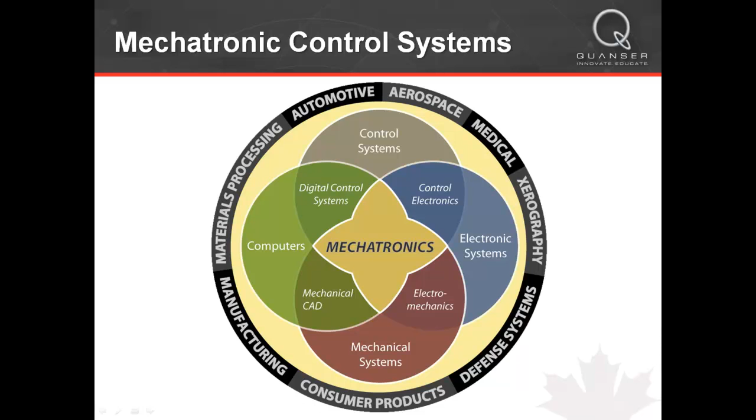So it's everything - enable educators. We've been at this now for more than two decades, and there are over 2,500 engineering universities around the world that use Quanser solutions. So pretty much every top institution you can think of, whether it be Princeton or Stanford or IITs or MITs, most universities in the world are using something or another from Quanser, whether it be hardware or software or data acquisition cards or whatever.

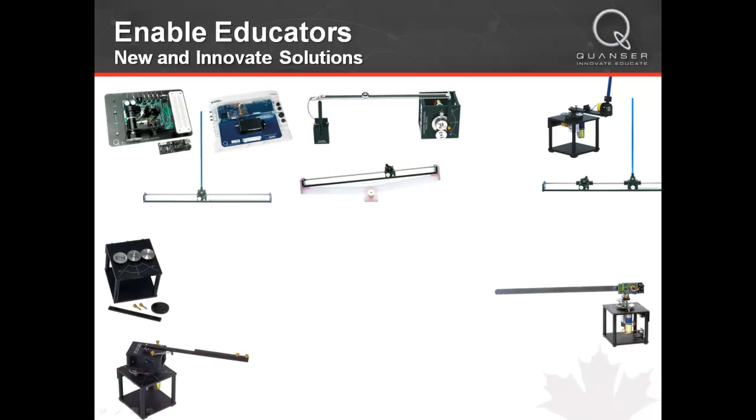Over the years, we've had the opportunity to build over 100 different experiments, such as DC motors, everything from robots to unmanned air vehicles and helicopters and earthquake shake tables, and the list just goes on and on, with the common theme once again being real-time controls and mechatronics.

I've spoken about this again in previous videos, but I wanted to go over it again: our systems are, or I'd say 90 to 95% of our systems are at this point, or will be very soon in a very short period of time, fully compatible with LabVIEW. In fact, we even released new software called RCP, which will make LabVIEW users working in the control space' lives considerably easier.

I wanted to quickly show one page from our website. If you come to our site and click on workstation components and go down to control software for NI LabVIEW users, you can get a lot of information. Go to quanser.com, then workstation, then control software for NI LabVIEW. The specs are right there on the left-hand side, and you can link to all our blog articles and YouTube videos - a great resource to learn more about RCP.

So our recommendation, or what we've seen work in the field, is that universities that have the vision and foresight to bring together all these labs into one space really increase the value of the experience for students and professors, and from a price point perspective, it reduces the cost of that one multidisciplinary lab considerably.

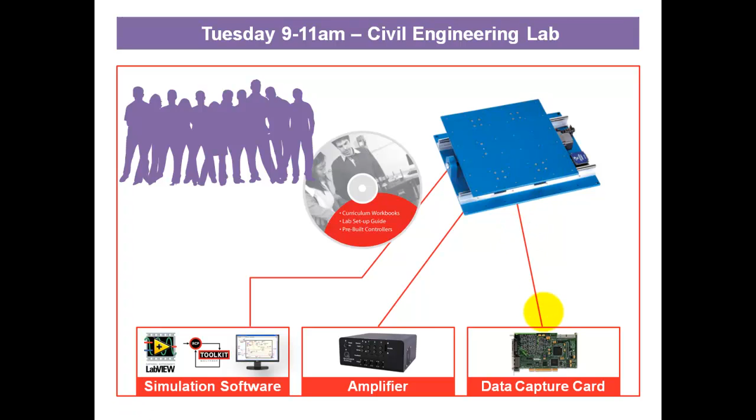So let's say you have a civil engineering professor who wants to simulate different types of earthquakes on building structures, and they need a shake table. You can essentially roll up the shake table, connect it to your amplifier and data acquisition and to your computer, and you've got a civil engineering lab.

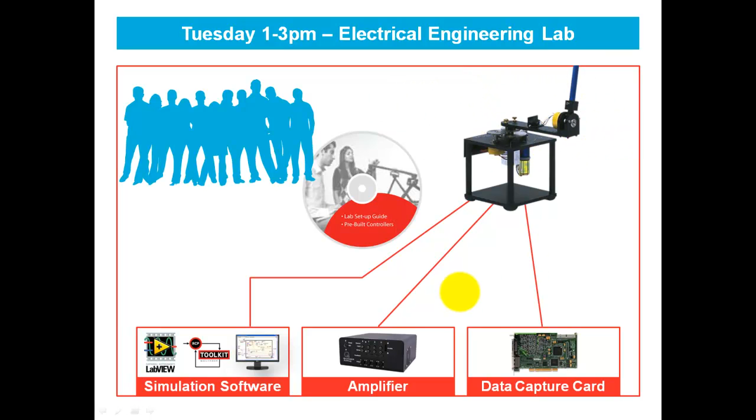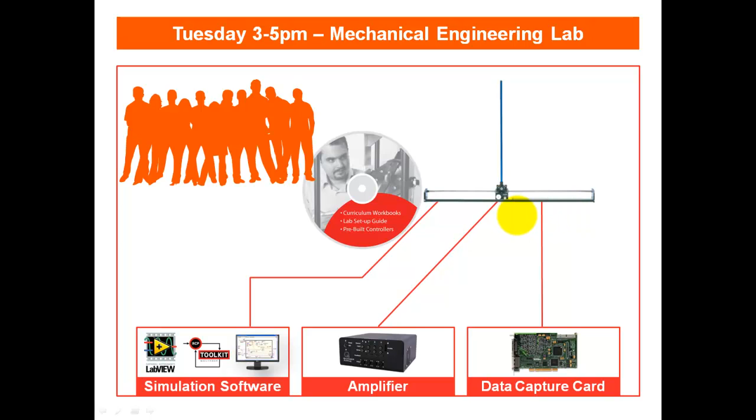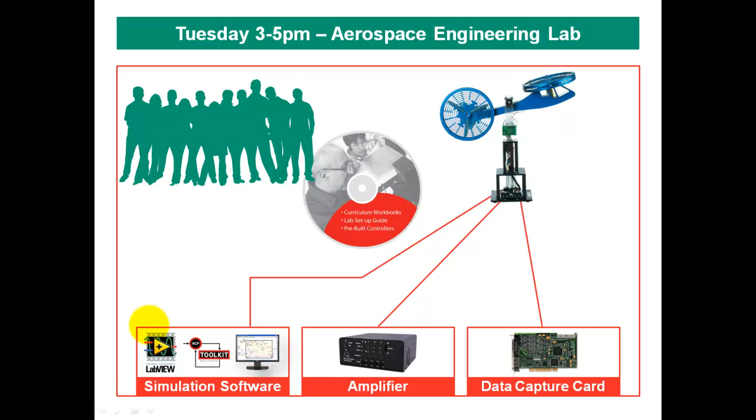Now let's say the rotary inverted pendulum system is being used for an electrical engineering lab. You don't need to purchase all the base equipment over and over again, you essentially have this common platform. Same thing for mechanical engineering, whether for a linear inverted pendulum system, or for an aerospace engineering lab where they need a 2 or 3 degree of freedom helicopter. The possibilities are really limitless, and by not having to purchase hardware and software over and over again, you save a lot of money in the long run.

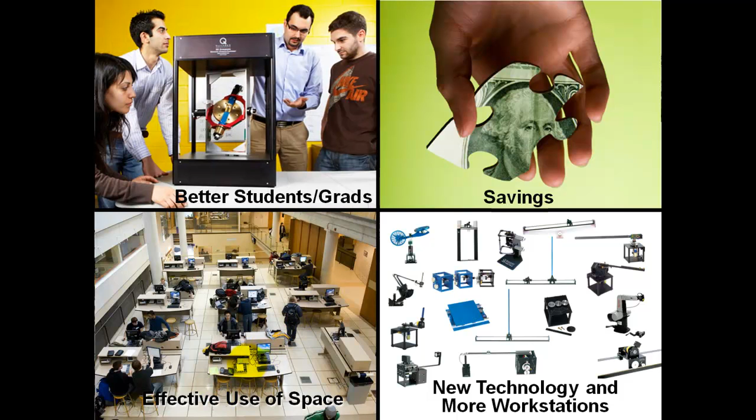So what do you see in the top left there? You see essentially what I felt like when I was in engineering, just overwhelmed. And when you look at the top right, you see there's a budget crunch right now all over the world. So in spite of wanting to save money, how do you effectively use your space, and more importantly, how do you bring new technology and more workstations to your students? That's the whole goal.

Quanser's in the business of captivating, motivating, and graduating quality engineering students, and we believe that a lot more students would be engaged and probably still in engineering if there was some sort of exposure to hands-on equipment earlier on in their career.

So the next part of the presentation, this is still part of the overview before we move into the actual details of any products, is we also work really hard at engaging researchers.

So here's an example of how we work with Dr. Venkat Krovi to bring one of his visions to life, which is a 6 degree of freedom hexapod. I wonder if I can share this video with you here. Yes, I can. So this is the 6 degree of freedom hexapod.

In fact, the story behind this, I believe, is that they were actually looking to replicate a saber-toothed tiger's jaws using a mechatronic system, for some sort of industry application. You see here that they've integrated the 6 degree of freedom hexapod, which is now a product of Quanser's. Obviously it looks a lot prettier than this; this is all opened up so you see the inside of it.

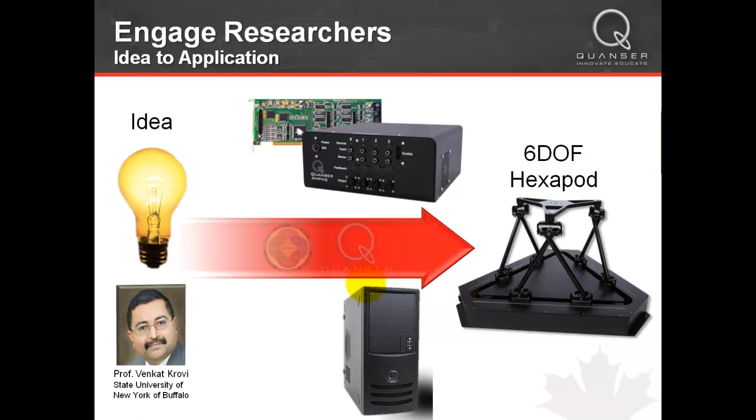There's a force-torque sensor on the top of this hexapod, and it's actually integrated with this haptic device, which we'll be talking about later in the presentation. This system is very complicated, 6 degrees of freedom, heavy payload - you've got 6 electric motors on there, computers, and data acquisition cards. This was not an easy project, but it was feasible because of Quanser's core expertise in mechatronics and control systems.

As we do work on specific research projects, our goal is always to turn around and offer these solutions as some sort of product for other universities to use, as you saw there with the Hexapod, the 6 degree of freedom platform, and the Denso robot, which is again a wonderful platform for doing research. So you can ask us more about these systems here as well.

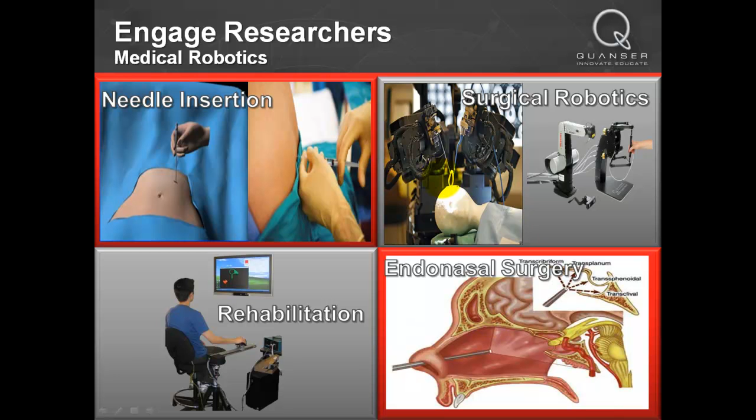I'm not going to spend too much time on this because there's quite a bit I want to share. So here, engaged researchers - we've done work in medical robotics, needle insertion, surgical robotics, rehabilitation, endonasal, and I haven't even talked about the SEAL project, which is just crazy. Maybe in a later video we'll talk about that. We offer unmanned vehicle systems as well. If you're doing research in that area, do contact us.

The 21st century will be known as the age of automatic control. I love that quote, that's one of my favorite quotes. National Instruments is really at the forefront of this movement, and Quanser is very, very happy and proud to be partnering with a company like NI to really be able to bring cutting edge technology into the engineering lab.

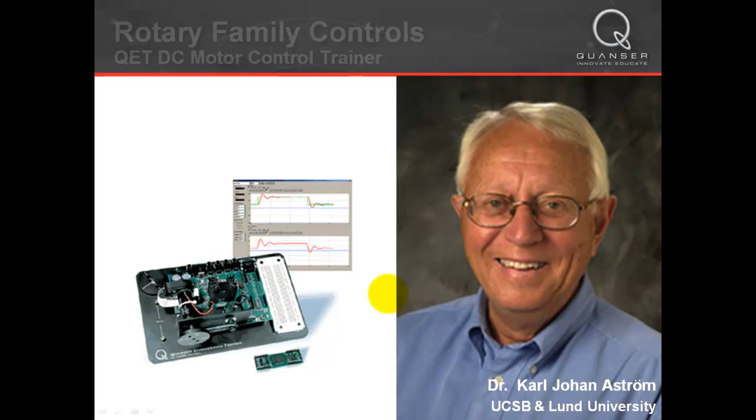So again, I want to just keep going here, and I want to talk a little bit about the solutions for teaching and research. The first system I wanted to talk about is actually, well, we have the QET, but more than the QET, actually, I wanted to share - many of you may already be familiar with our QNet line of products.

The QNet DC motor control trainer, the QNet rotary inverted pendulum trainer, there's the QNet heat ventilation and control trainer, and there's the QNet vertical takeoff and landing trainer. There's the QNet mechatronic sensor trainer, which is just awesome. There's also the QNet myoelectrics board.

So these are 6 introductory platforms for controls purposes. I mean, I guess you could use this one for introducing biomedical, but most of these systems are designed for a controls lab. And these are what we call at Quanser Tier 1 products.

There's a really nice video online, actually, on the NI website, that if you go to this page that I'm showing here, you can actually check out this video. I'm not going to play the whole thing, but I wanted to just share a few seconds of it.

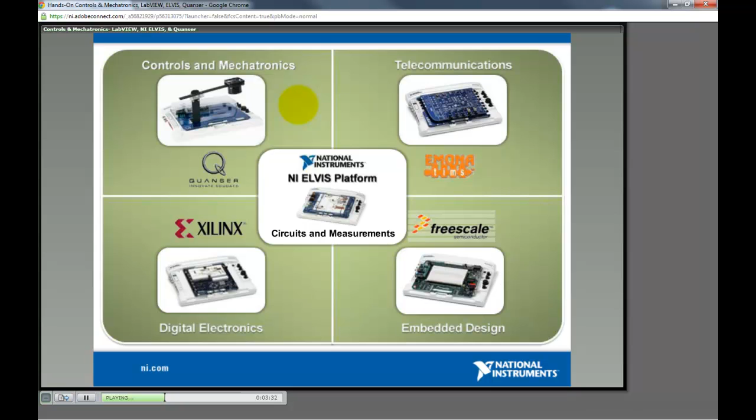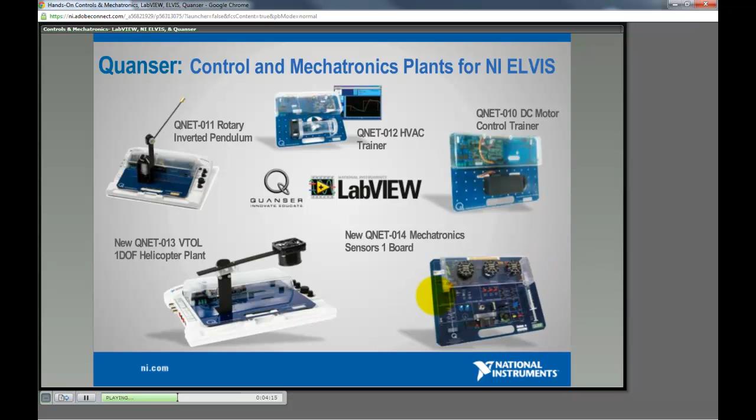Add-on modules include Elvis plants created by partners such as Quanser for controls and mechatronics, Emona for telecommunications, embedded design made by Freescale, and digital electronics boards made by Xilinx. These extensions to NI Elvis and the ease of use of LabVIEW software make Elvis an ideal multidisciplinary engineering platform. Use the NI Elvis to teach controls and engineering concepts, including circuit design, measurements and instrumentation, telecommunications, and more, not only for different courses, but for different departments, such as electrical, computer, biomedical, mechanical, aerospace engineering, and physics. NI Elvis is the perfect platform to teach control design concepts by taking advantage of the different plug-in boards created by Quanser, a leader in control design training systems for academia. Quanser offers 5 plug-in boards for NI Elvis: the QNet DC motor, the QNet HVAC system, the QNet inverted pendulum. Now, 2 additional boards have just been created by Quanser. This includes the Vertical Takeoff and Landing, or VTOL 1 degree of freedom helicopter plant, and the Mechatronic Sensors 1 board. These boards also include VIs and curriculum that educators can now use to teach the basics of control design.

Awesome. So once again, you can check out more about the QNets on NI's website. Again, I highly encourage you to do that.

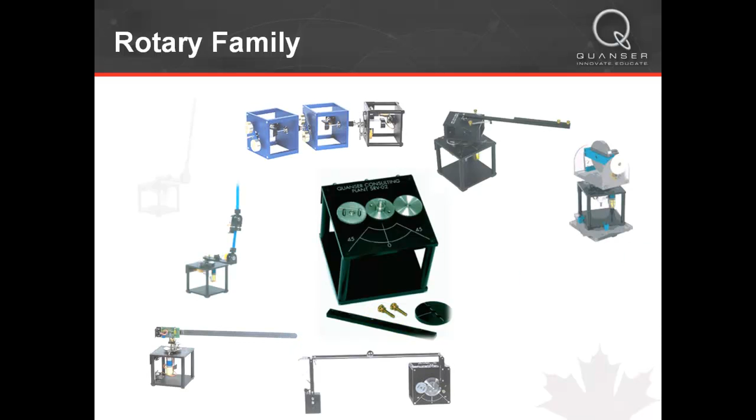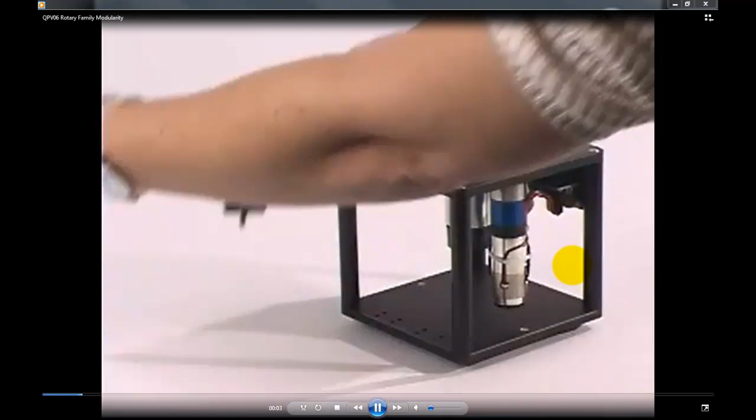So moving on, I wanted to talk about our most popular line of experiments, which is actually the rotary family. This is my favorite system of Quanser's, and let's see if we can, instead of just talking here, let me see if I can share some video. So the SRV02 is modular, like I said. Not only is it modular in terms of you can use different experiments like ball and beam and helicopters, the systems themselves are modular. So they're really like Lego for adults.

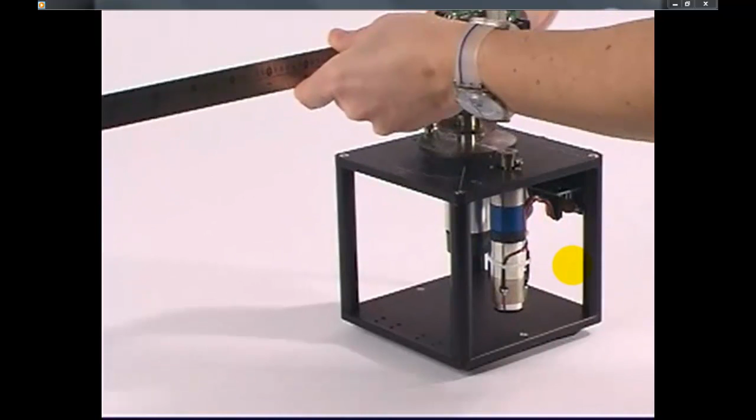So here you see the user putting on the flexible link experiment. This represents a robotic arm in space that's flexible. And so how do you design a controller to minimize the oscillation in a flexible link, right?

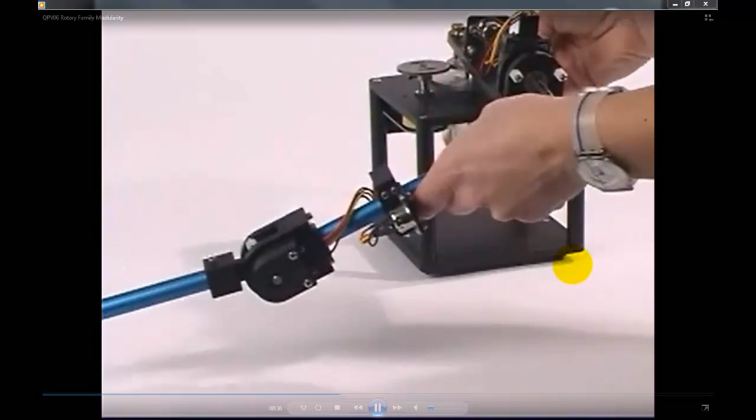Well, you mount it on top of the SRV02, start the experiment up, and in a few seconds you've got a very novel lab. Now, let's say you want to do a double inverted pendulum. No problem, just snap on the module and you're off to the races.

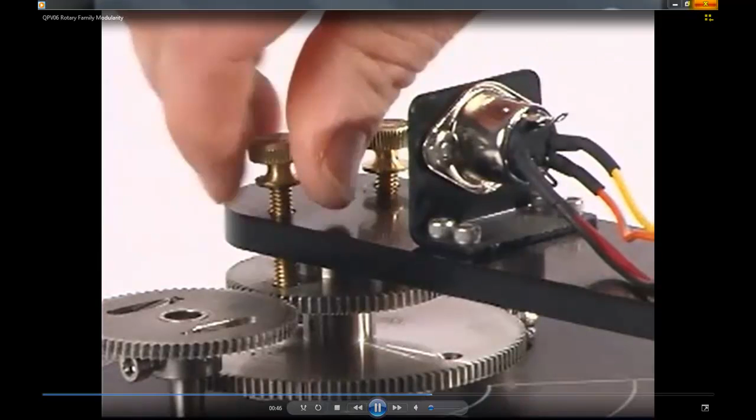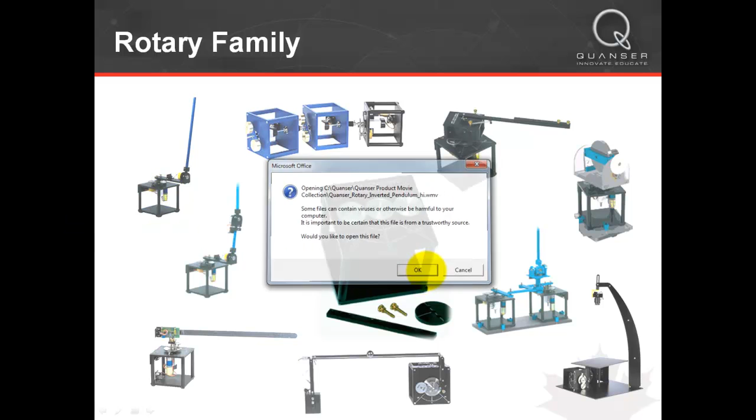This modular aspect of the SRV02 is really what has made it so popular. Again, you've got the rotary inverted pendulum here. This is probably the most popular experiment.

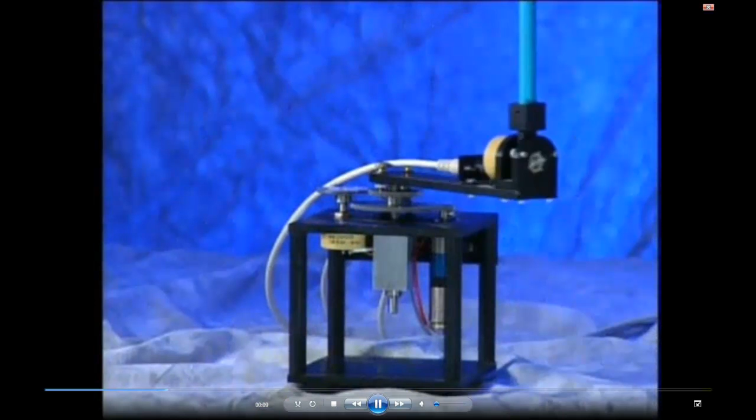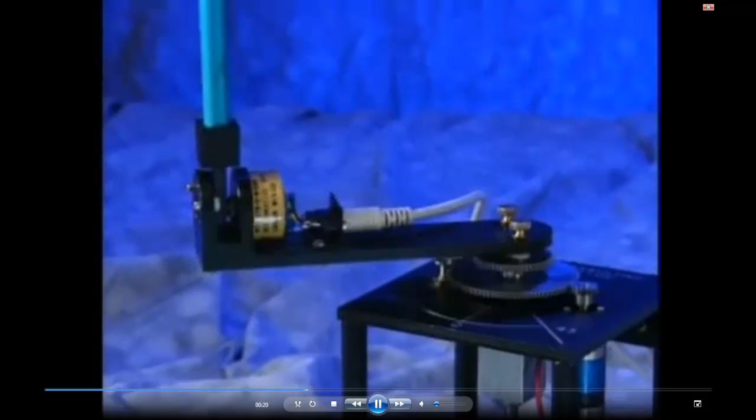So there you go. This video, I apologize, is a little bit older, and as you see there's a potentiometer here, so we use digital encoders now, and the system itself may look a little different, but 99% of it's the same. So there's a nice little video of that.

I'd like to show more videos, but I'm going to jump to my favorite one, which is the ball and plate. So here you've got two servos.

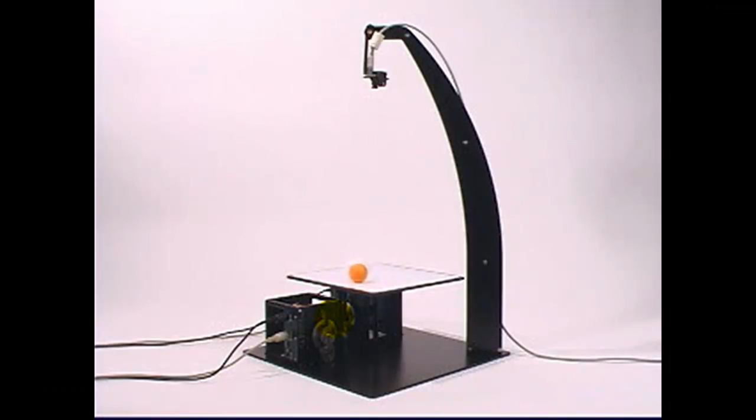So now you can take two of your servos. By the way, you can teach position control, speed control. I'll be doing more videos on this later, but you can teach many basic things with the servo itself, and then it acts as part of this larger module.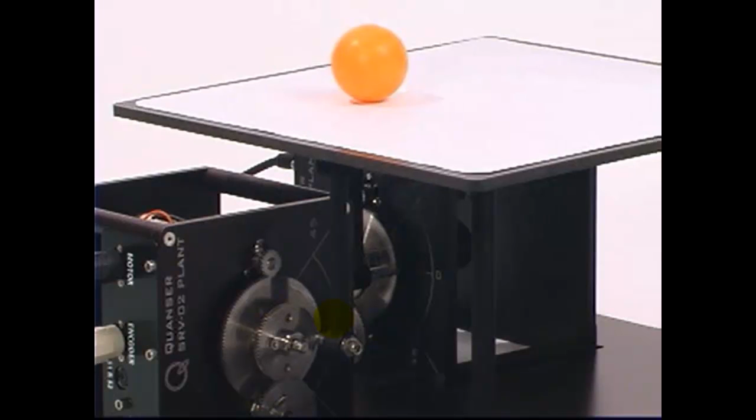So you see two servos, one in the back, one in the front, and they're connected to this new module, which is a plate, and you've got a camera on top.

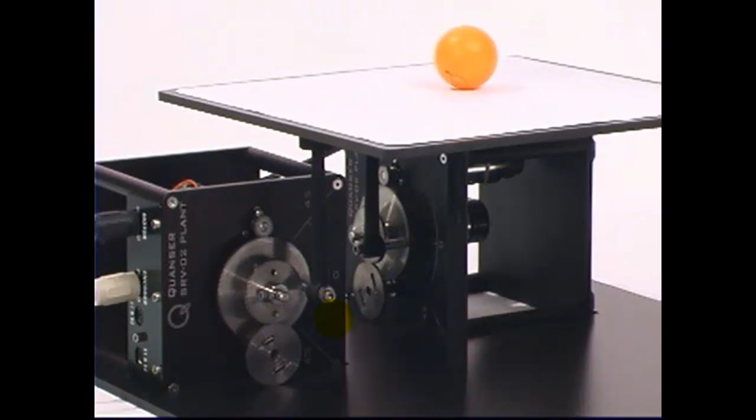The idea is for the student to design a control system to balance that ball on top of the plate. Once they balance it, whether they want to create a pattern with it, like a square or a circle, it doesn't matter. The idea is how do you use vision control to drive the mechatronic system?

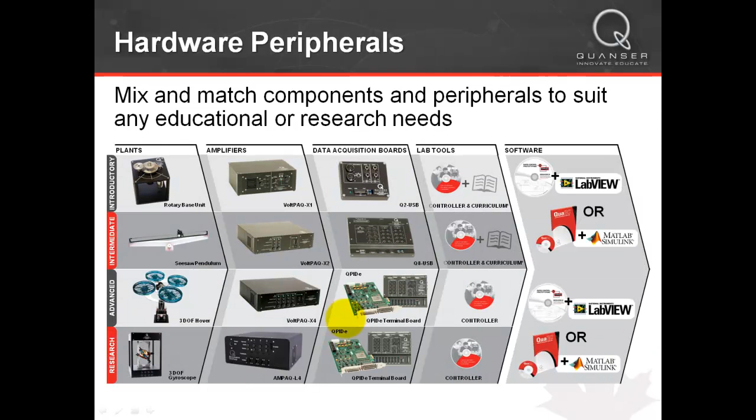So I'm going to keep moving on here. Quanser has invested a lot of time and energy into our hardware peripherals, so please do ask us about getting more information on this. We have a whole range of hardware and software designed from introductory all the way up to research. There will be more videos on this later if there's interest.

The virtual labs is another important part of our labs, and as I mentioned before, we offer curriculum, which is very, very important. I wanted to quickly go through some of these here.

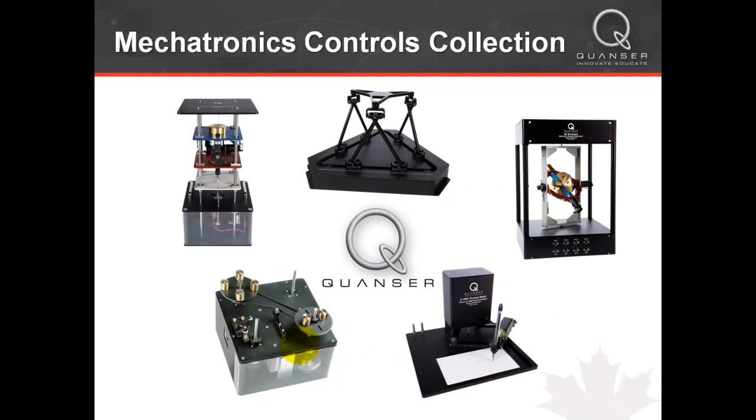Not in any detail, but we have five systems: the six degree of freedom hexapod, the 3DOF gyro, the 2DOF planar robot, the industrial mechatronics drive unit, and the active suspension system. These are all great hands-on, application-oriented systems that really get your students excited, and allow you to implement all the theory you learn on a real system.

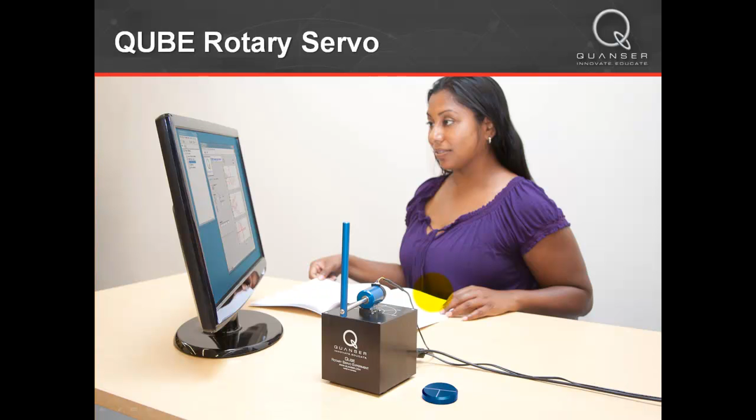Now I wanted to finish off the video talking a little bit about the QUBE rotary servo system. This is a system that is just being released in South Asia, mainly in India to start with. Here is a picture of the actual system for the QUBE. It's similar to the SRV02, but smaller, more compact, and lower cost.

And as you see, it's modular, but it actually uses a magnet. It's a beautiful system. It's going to be integrated with NI LabVIEW.

I'm just going to finish off today's presentation by running a video of the QUBE workshop that we performed last month. So I'll finish off with this slide here.

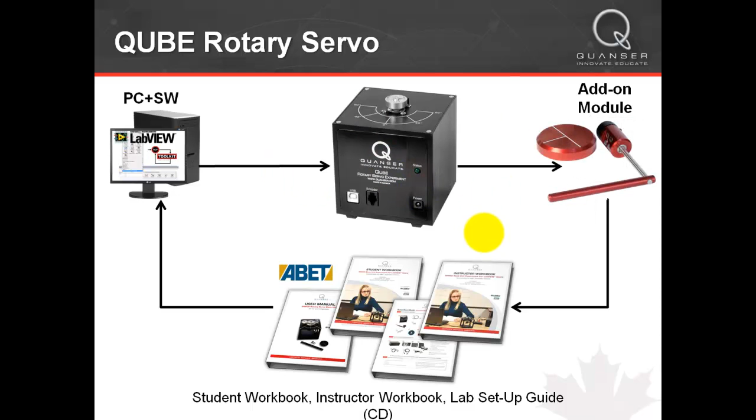So once again, if you would like to see the video, you can check it out on YouTube, but I'll just play a few seconds of it here.

Show you what graphical system design can mean.

So this is a concept of graphical system design. Before I start to explain graphical system design, let's know what is system design. So what do you think is...